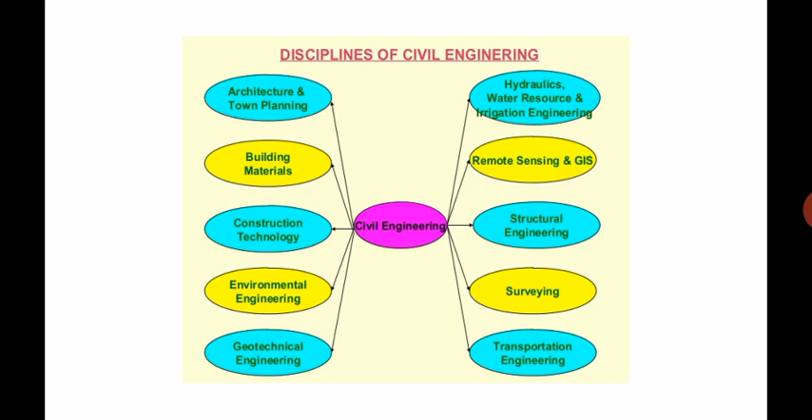So these are the disciplines of civil engineering. First one is architecture and town planning. What is the importance of architecture? Architecture gives beauty to buildings. It enhances the appearance and it maintains heritage.

Town planning is now separated from civil engineering. Town planning includes planning the layout of the town, planning the roads in different gridways, separating commercial, residential, academic and industrial areas, planning green belts. A very important thing is planning proper sewage and disposal units, planning water treatment plants and water storage units. These are all included in town planning. Town planning was once upon a time included in civil engineering, but now it is separated from civil engineering.

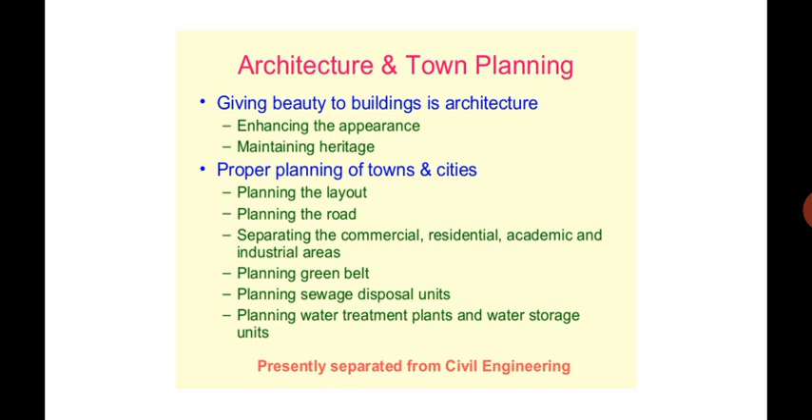Next is building materials and technology. What are building materials? Building materials are the materials which are used for construction of buildings. They may be bricks, tiles, soil, cement, stone, sand, steel, etc., which include construction materials. These materials can be available naturally or some are man-made. These days, there are many new trends and new technologies available in the manufacturing process of building materials. There are different varieties of building materials we can get today.

So what does this building material technology deal with? It deals with proper use of desired material economically and safely. It is very important to use desired materials. There are many materials available to us, but it is very important to choose which is a desired material, which is available economically, and which is very safe to use.

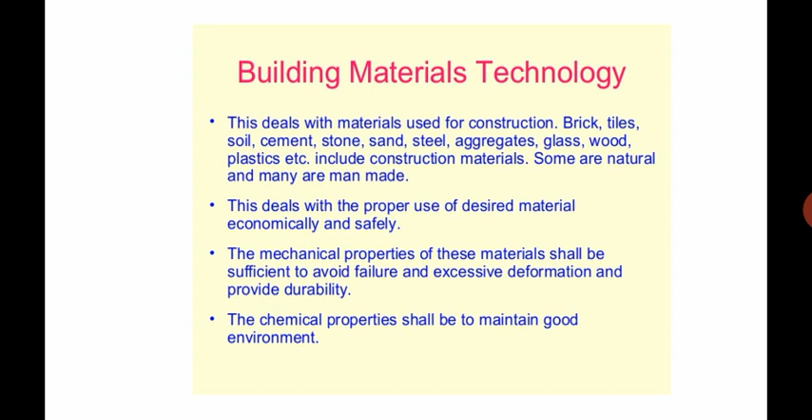Construction technology and management is one of the disciplines which deals with planning, scheduling, execution of construction activities related to a project.

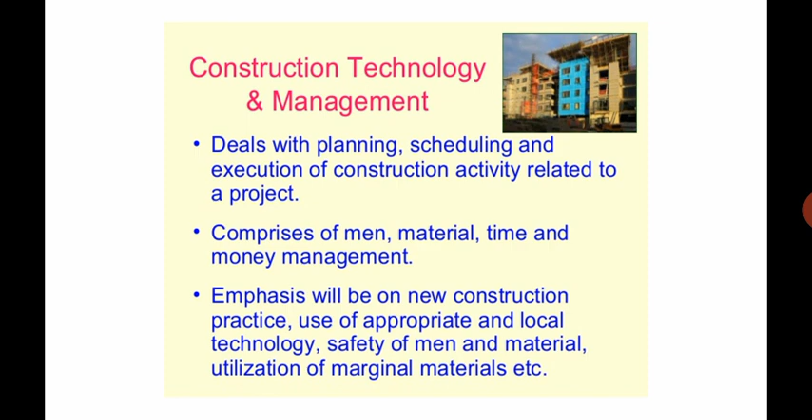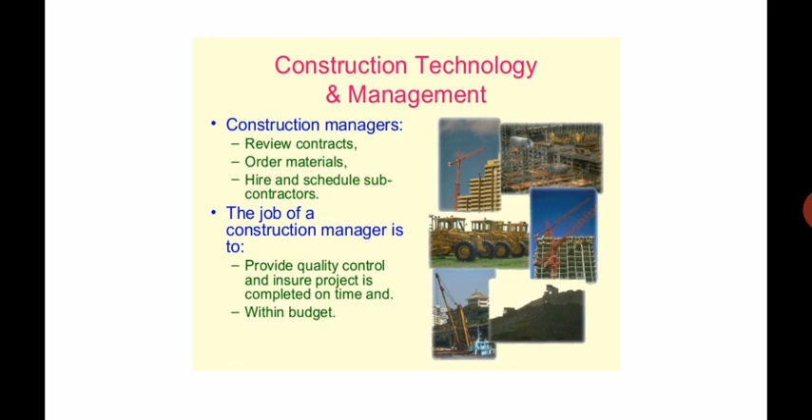What exactly do construction managers do? They review contracts. You know what is a contract? It is a legal document. They order materials and they hire and schedule the subcontractors. So the job of a construction manager is to provide quality control and ensure the project is completed on time, that too within the budget. We have already discussed that when we choose a building material, it should be economical.

Next discipline is environmental engineering. Generally people think that environmental engineering means study of the environment around us. But what exactly environmental engineering in civil engineering deals with is the technology to save nature from human and natural abuse and pollution. So the study involves a balanced compromise between environment and safety.

It deals with the technique of water collection, purification, and supply. We need to supply drinking water which is potable. At the same time, wastewater collection - we need to collect the waste from different buildings, it may be commercial, industrial, or residential. So it deals with how the waste is collected, how it is treated, and how it is disposed of, or how it is reused. It also deals with control of all types of pollution and solid waste management.

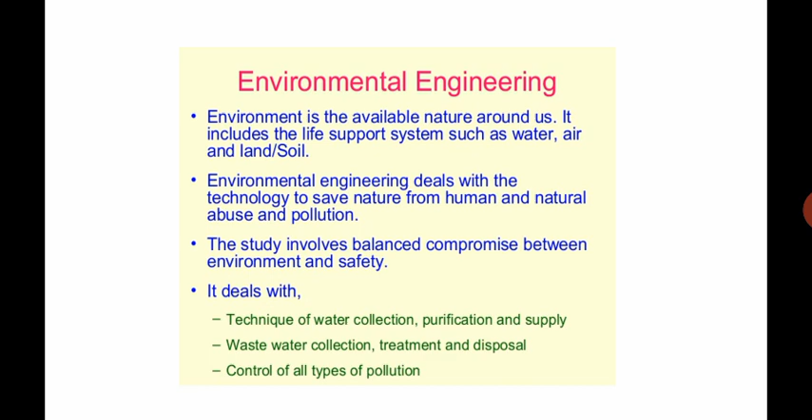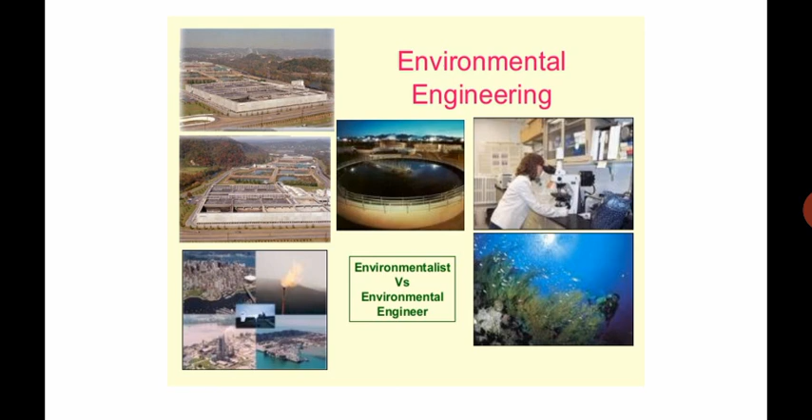Environmentalist versus environmental engineer - they are different. Environmental engineer deals with the technique of water collection, purification, supply, wastewater collection, treatment and disposal, whereas environmentalist deals with all aspects of environment.

Next discipline is geotechnical engineering. All structures are founded on ground, you know that. So what exactly geotechnical engineering involves is understanding the ground behavior, soil characteristics and interaction between soil and structure. It involves foundations, slopes, retaining structures, highway pavement design, embankments, earth dams, tunnels, underground structures, etc.

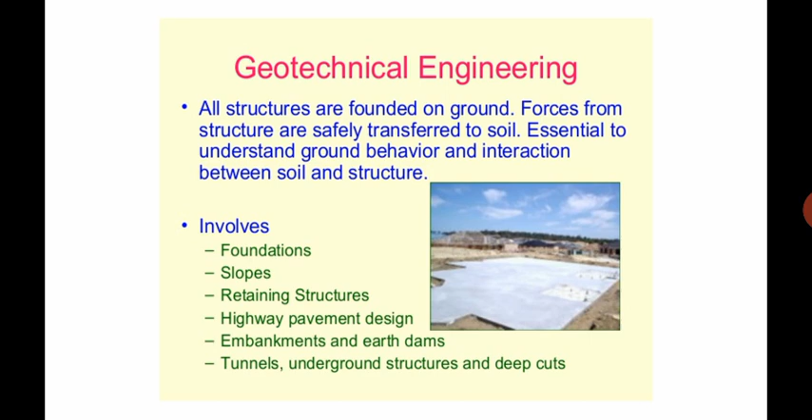Do you know what exactly is a foundation? Foundation is a structure which takes the loads from the superstructure and distributes them to the soil safely. It is a very important element of any structure you take. So in geotechnical engineering, we assess the quality of soil and also rock to carry the structure.

If the soil quality is not good, we either replace the soil or we go for deep foundations. So proper knowledge of geotechnical engineering is very much necessary for safety and stability of structures.

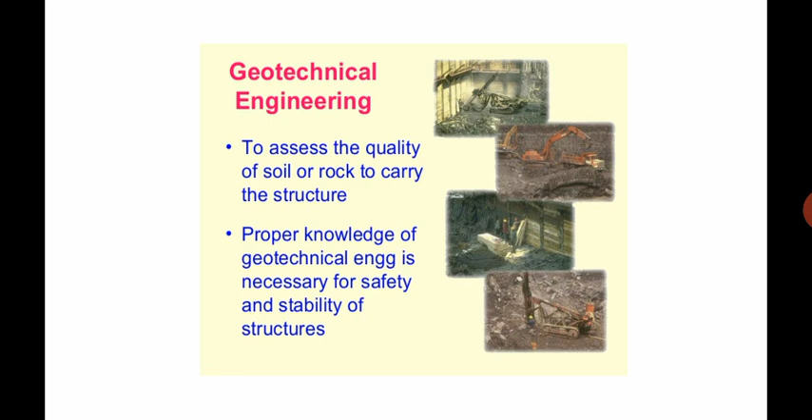Next is hydraulics, water resource and irrigation engineering. You know what is hydrology? Hydrology is study of water. So what exactly hydraulics deals with? Hydraulics deals with mechanics of water or fluid flow. Fluid may be water or any liquid.

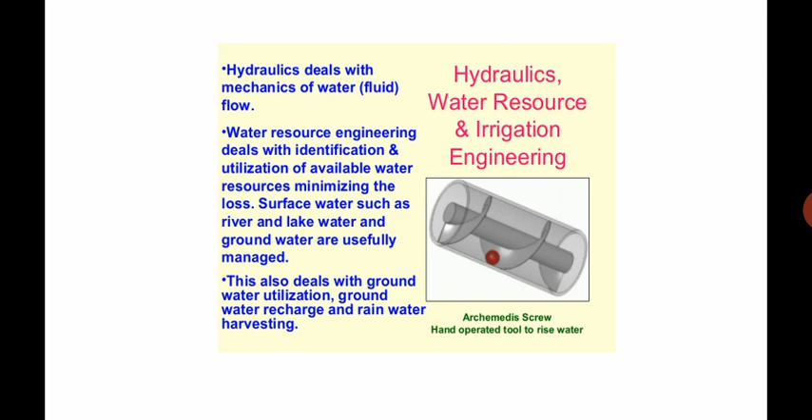Water resource engineering deals with identification and utilization of available water. Irrigation, you know what irrigation engineering is - engineering dealing with irrigation is called irrigation engineering. Groundwater utilization, groundwater recharge and rainwater harvesting, all these things come under irrigation engineering.

Next is hydraulics, water resource and irrigation - this we have already discussed. Irrigation engineering deals with water management for agriculture purpose. There will be how water is distributed from dam to the very field channel.

So what is a dam? Why are dams constructed? Where are dams constructed? Dams are constructed at desired locations to store water. We cannot construct a dam in between a town, right? We need to construct a dam where a river is flowing, and we need to store the water in a reservoir, to supply it for drinking purpose, agricultural purpose and many water supply purposes.

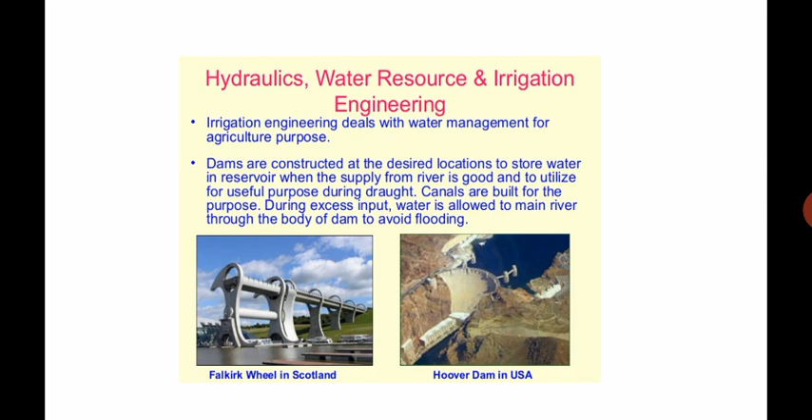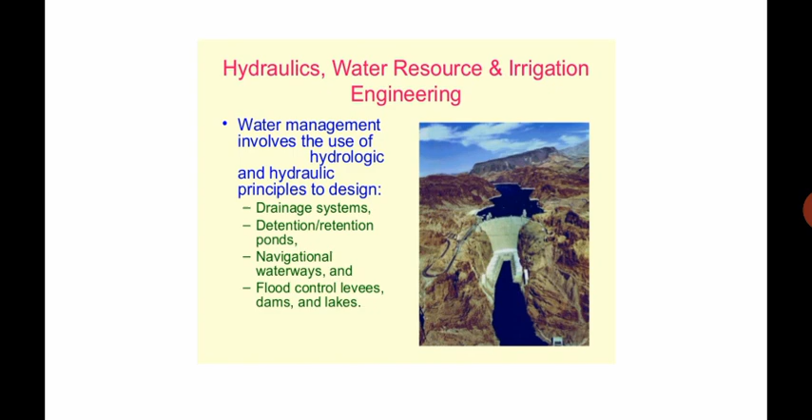So what exactly does water management involve? They deal with drainage systems, detention ponds, navigational waterways, etc.

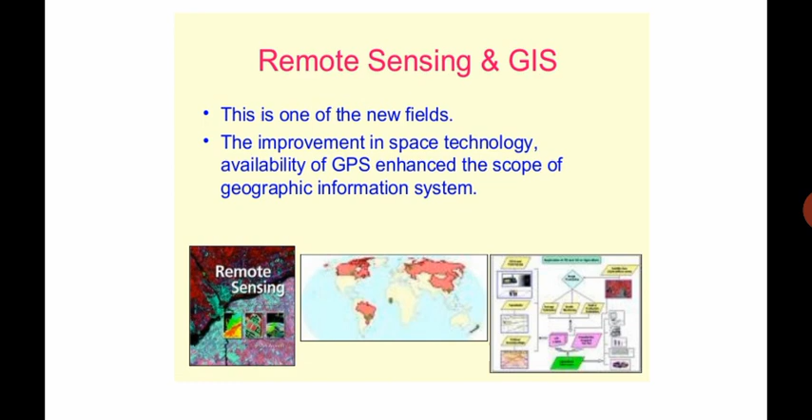Next is remote sensing and GIS. GIS is geographical information systems. These two are among the new fields. They deal with improvements in space technology - how we can collect the data from space, from satellites, how the data is collected from space, how it is processed and how it is utilized by a civil engineer. It all deals with the subject of remote sensing.

So all the details I have given you in this slide. Good mapping technique helps us to get required information accurately. You know what a map is and how it is useful - all these things are included in this slide. Please go through this slide.

Next discipline is structural engineering. What is a structure? A structure is anything - a structure is a series of connected, interrelated elements that form together a system which can resist a series of external load effects applied to it.

Next discipline is surveying. In general, surveying is the art of determining relative positions of various points on the earth, above the earth, or below the earth. So what exactly do we do in surveying? We find the relative positions of various points. So how is it useful? Surveying is useful in collection of data. What kind of data do we collect? We collect data of topographic features of a location for future construction. They help us in preparing plans or maps in detail which may be used for construction purposes.

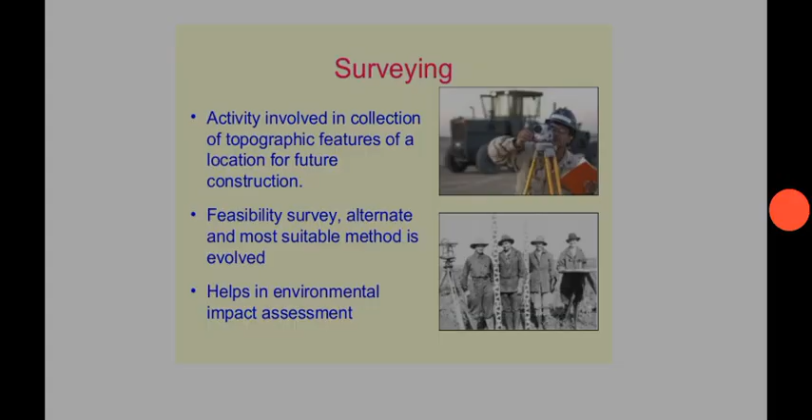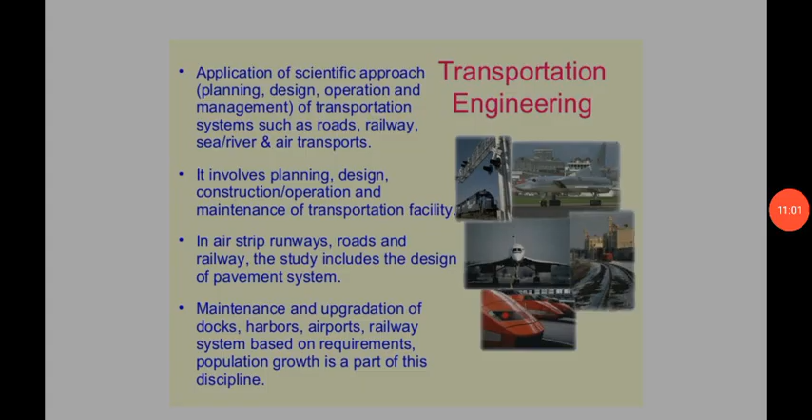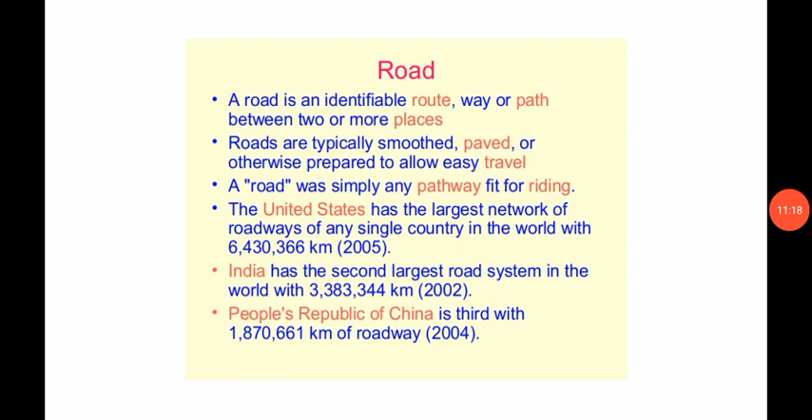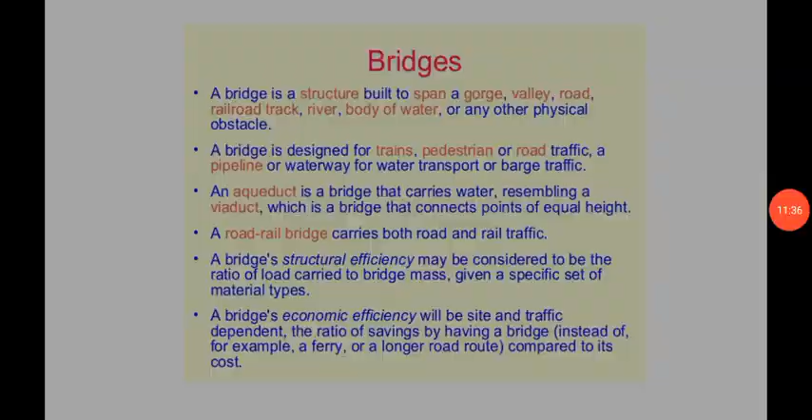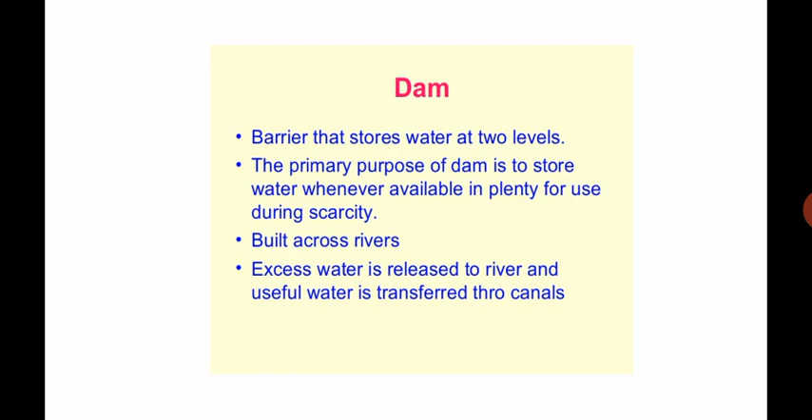Next is dam - you know what a dam is, I have already told you in my previous slides. Dam is a barrier that stores water at two levels. The primary purpose of a dam is to store water, whenever available in plenty, for use during scarcity. That water can be used for drinking purpose, domestic purpose and agricultural purpose.

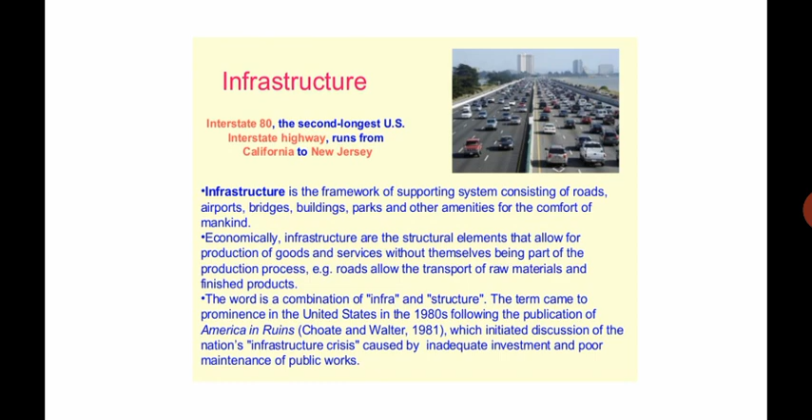Next discipline is infrastructure. So you know what exactly is an infrastructure? Infrastructures are the structural elements that allow for the production of goods and services without themselves being part of the production process. Example, roads allow transportation of raw materials and finished products.

So what exactly infrastructure deals with is transportation. Transportation includes road network, railways, ports and harbors, air travel and airports. Second one is television network, which is also a means of communication. Telephone network includes landlines and mobile phones. Energy sector includes electrification and use of renewable energy such as solar, wind, and biogas plants. These are eco-friendly techniques.

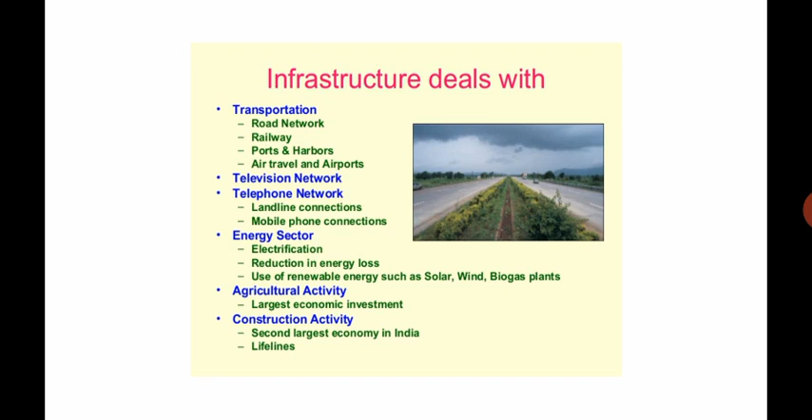So what exactly does a civil engineer do? He analyzes long range plans, survey reports, maps, and other data to plan and design projects. Without maps we cannot plan or design projects. So what he does is collect all plans, survey reports, survey maps, and other data which can be useful to plan and design projects.

He will also consider construction cost. I have already told you how cost plays an important role. For example, there are two bricks available - one brick costs 16 rupees and another costs 12 rupees. So which one are you going to buy? When both of them give equal quality for the structure, we will definitely go for the lesser cost. So he will be considering the construction cost too.

And we need to go for government regulations. There are many regulations given by the government which we need to follow. Potential environmental hazards - we cannot construct a building which will cause effect to the environment. So definitely we need to consider environmental hazards.

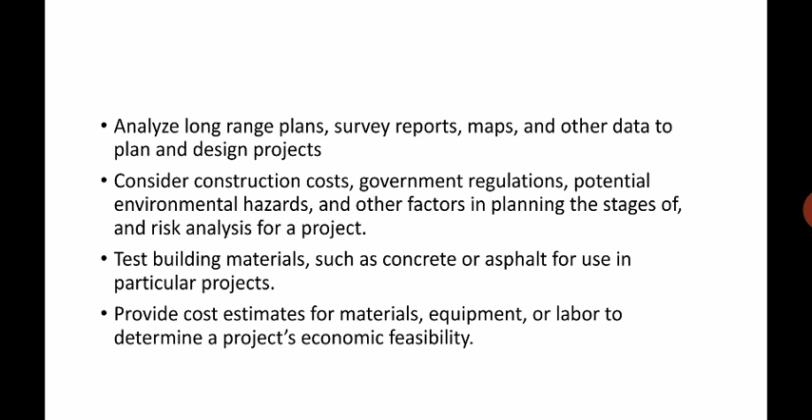Okay, so the next role of a civil engineer is to provide cost estimates. You know what an estimate is? So he needs to provide cost estimates for materials, equipment, and labor, to determine the complete project budget and also to determine economic feasibility.

Next role is to use design software, for example AutoCAD, STAAD. So he needs to have knowledge of software. At the same time, he should use the perfect software which gives more output. And he should also have knowledge of hydraulic systems, structures in line with industry and government standards too. Apart from this, he should have knowledge of codes.

For example, IS 456 is the basic code book we use for plain and reinforced concrete. In the same way, he should have knowledge of codes, and he should be involved in maintenance, repair, and replacement of public and private infrastructures.

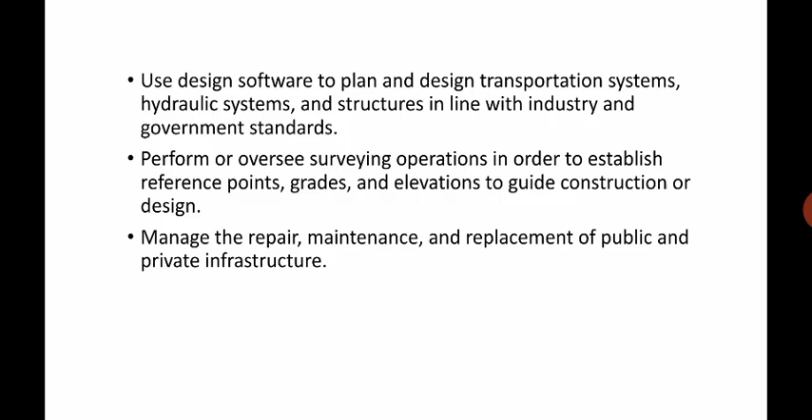So guys, this is about introduction to civil engineering and civil engineers. Civil engineering has a significant role in the life of every human being, though one may not truly sense its importance in our daily routine. The function of civil engineering commences with the start of a day when we take a shower, since the water is delivered through a water supply system including a well-designed network of pipes, water treatment plants, and other numerous associated services. So guys, this is my video about introduction to civil engineering and civil engineers.